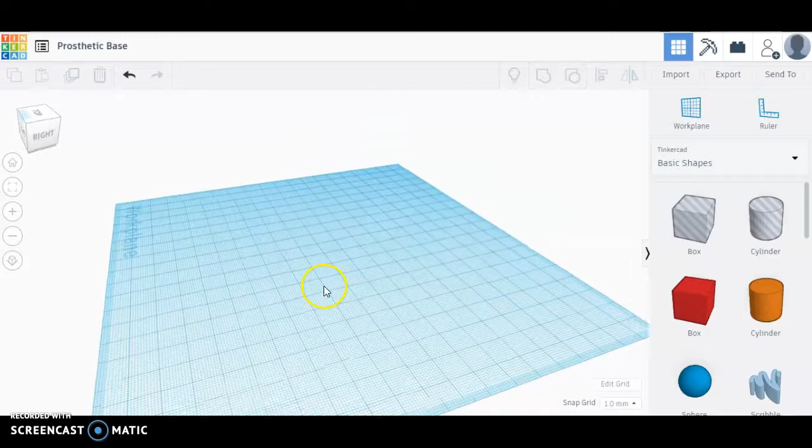Hi, this video is to show how to use TinkerCAD to build the base for the Whitebox prosthetic throwing arm in a way for 3D printing, as opposed to using balsa wood per their instructions.

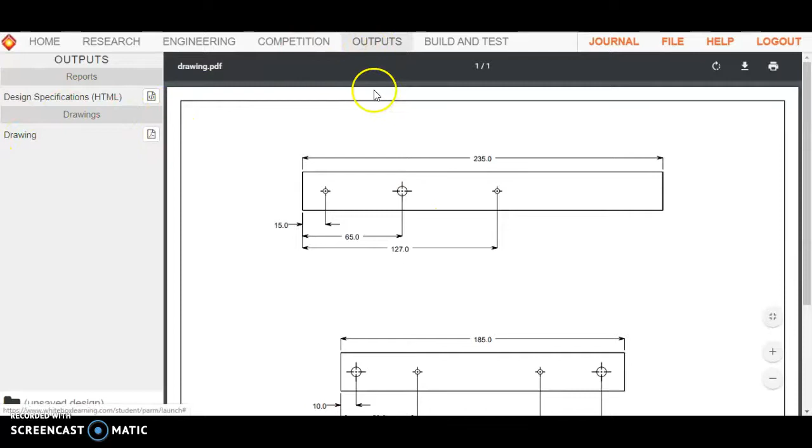We are going to be relying on the engineering drawing from the Outputs tab of Whitebox. This is the default drawing without any changes. Note that your dimensions are going to differ based on your specific design. We're also going to be looking at the build and test instructions and using these to modify the design or modify the build for 3D printing.

The first thing we'll need to notice is that the stock material here is 400 millimeter by 25 millimeter by 4 millimeter thick balsa wood stock. So when we build this in TinkerCAD, we're going to be using these dimensions.

Let's move over to the build instructions. We're going to begin by making a base from this 400 millimeter stock. This turns out to be important. We know that it's also 25 millimeters wide and 4 millimeters thick.

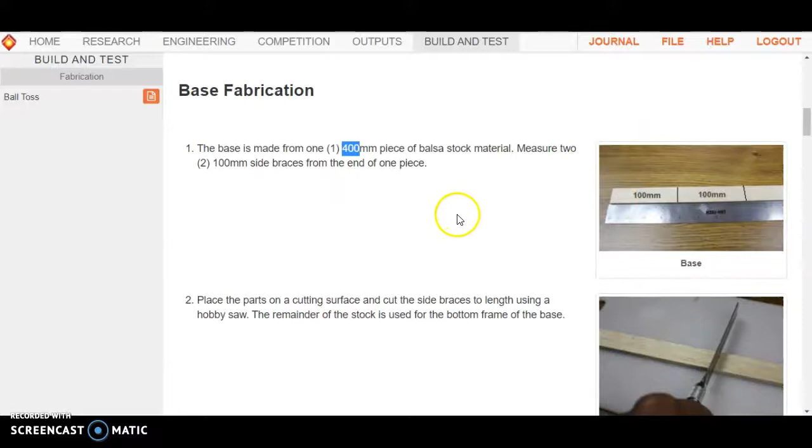The first instruction says measure 2 of these 100 millimeter pieces, and that's going to leave, out of this 400 millimeter stock, 200 millimeters left over. All right, let's get going in TinkerCAD.

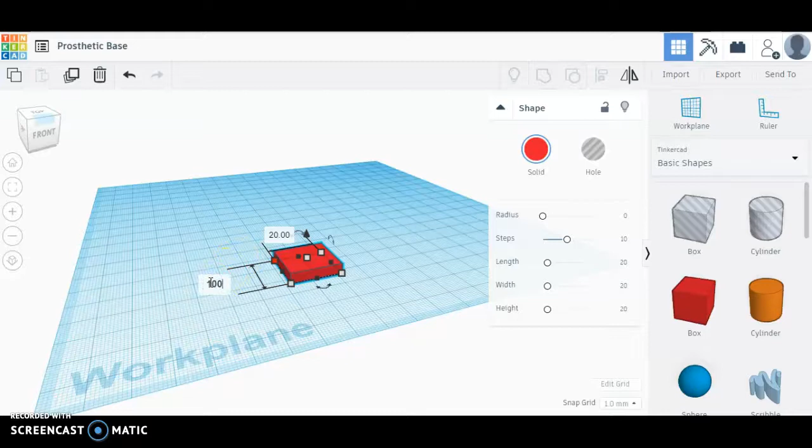We're going to add a rectangular cube for starters, and I'm going to reduce this height to 4 millimeters. Note that millimeters will be your default when you start working in TinkerCAD. Now, if I click on one of these corners, I'll have access to the other two dimensions. So we need to make this 100 millimeters by 25 — 25 is the width of that balsa wood stock — and I'll hit enter.

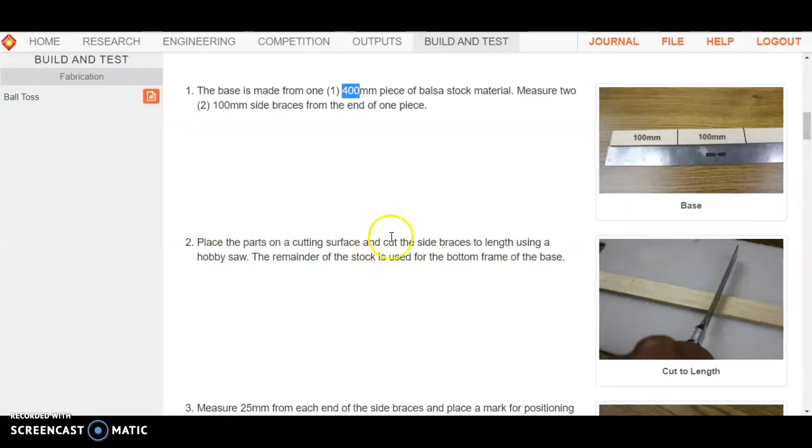We know ultimately we'll need 2 of these pieces, but since we're going to be putting a hole in them, I'll wait to copy until we have that hole in place. So, pieces are cut. We have our 100 millimeter pieces and our 200 millimeter piece.

Now we're told to mark 25 millimeters in. This is where things are going to line up with this edge. So this hole — there's no specification given for where to put this hole, but assuming that this line leaves 25 millimeters here, if we want to center that hole up, I guess it would be 12.5 millimeters from the end, to make it directly between the edge and this edge to center that.

Okay, so the hole needs to be 1/4 inch, which converting to millimeters is 6.35 millimeters. And you see how these pieces assemble here. So back to TinkerCAD.

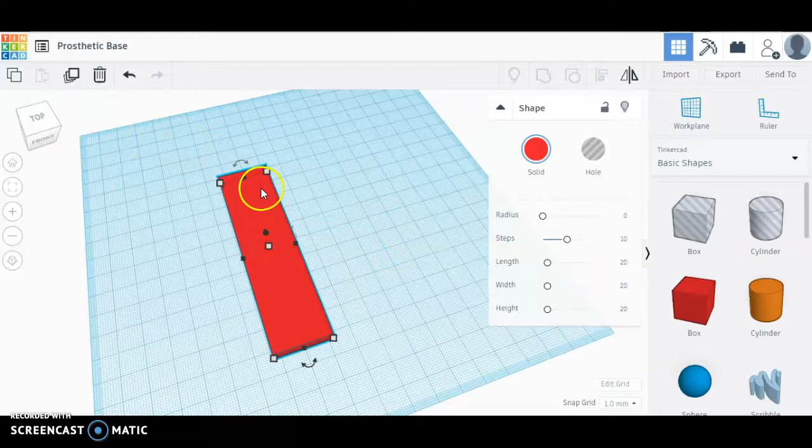We're going to want to begin by just making a copy of this piece that we can then make longer. Now there's a shortcut: if I hold the Alt button and drag, that should make a copy. I can also use the basic Control-C, Control-V. So this piece is going to be, instead of 100, 200 millimeters long.

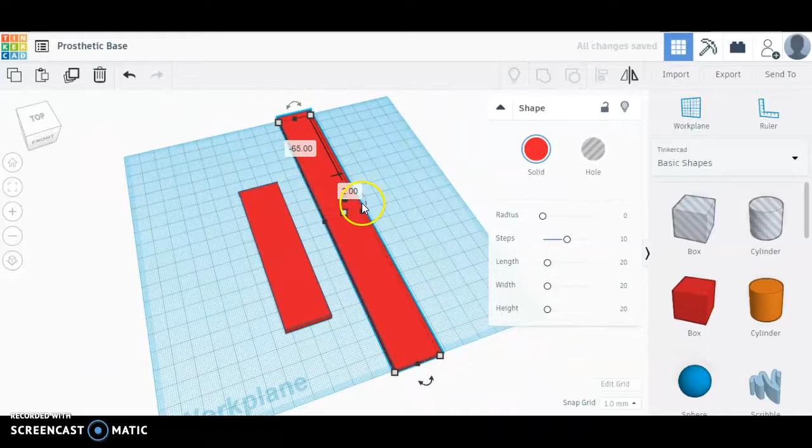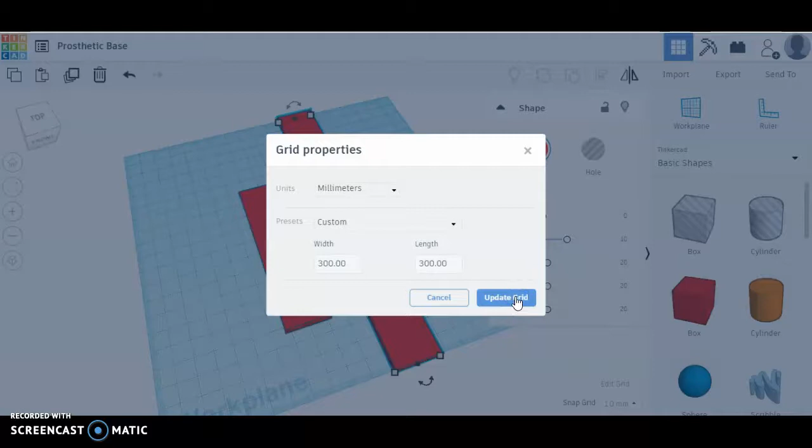Now note here, this piece doesn't fit on the grid, which is probably not any kind of problem. But if we did want to address that, we could adjust the grid, and so I guess it would just fit, but we could certainly adjust the grid to be 300 by 300 millimeters, or perhaps 300 by 200 would still have worked. Update the grid — now we're working on a larger build space.

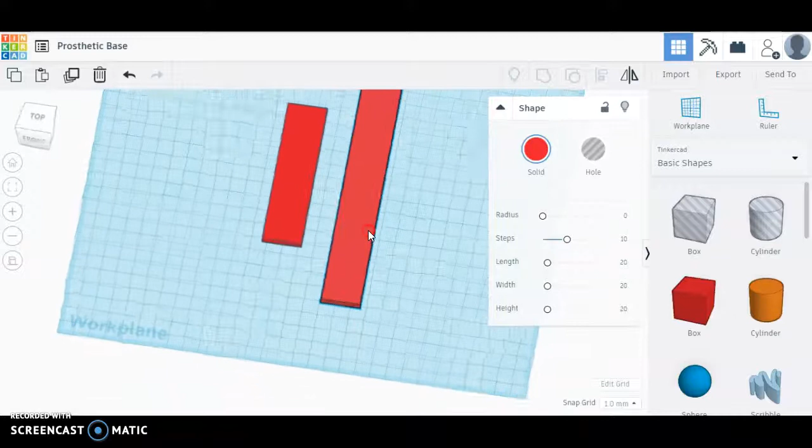Something that's going to help out here is if we use a top view as well as a perspective or orthographic flat view. Excuse me, we want to move off of perspective to a flat view for the purpose of lining some of these things up. Okay, back to a top view.

Next we're going to want to add the hole like we had discussed, at 12.5 millimeters. So I'm going to drag a cylindrical hole. I like to change the number of sides to the maximum just to make these things smoother and more consistent. If I drop the number of sides down, you see things are moving a little slowly.

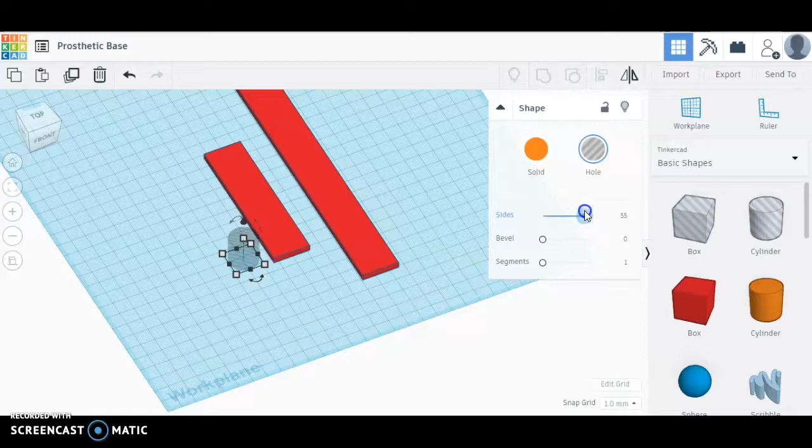You'll see that this thing is essentially a polygon. There you can start to see with a number of sides at 12, you can see how rough that is, and that maximizing those sides smooths that out.

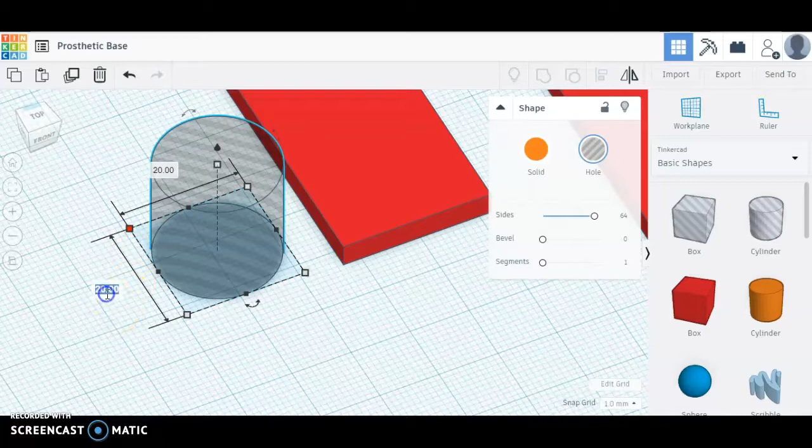Now, a 1/4 inch drilled hole is 6.35 millimeters. I'm going to recommend we bump that up to 7. The reason for that is that as these things 3D print and the plastic is melting, these holes often come out a little smaller than intended.

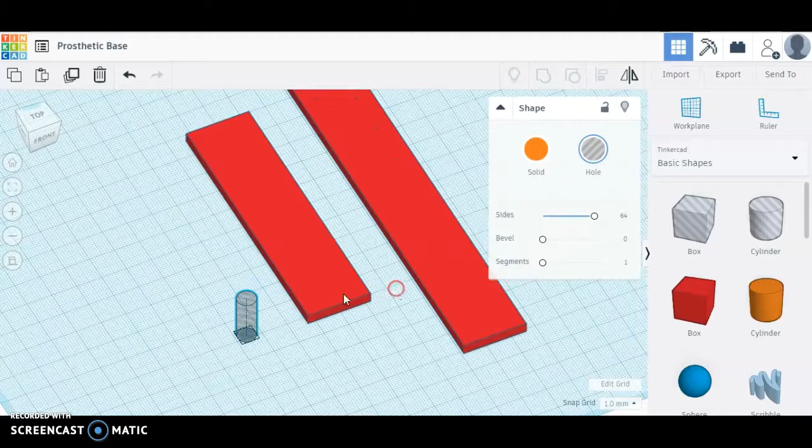Okay, so how to place this hole at exactly 12.5 millimeters. Here's a trick: we're going to use a ruler, and place it on one of our primary grid lines here. Notice that it's snapping to 1 millimeter, which is probably what we want at this time.

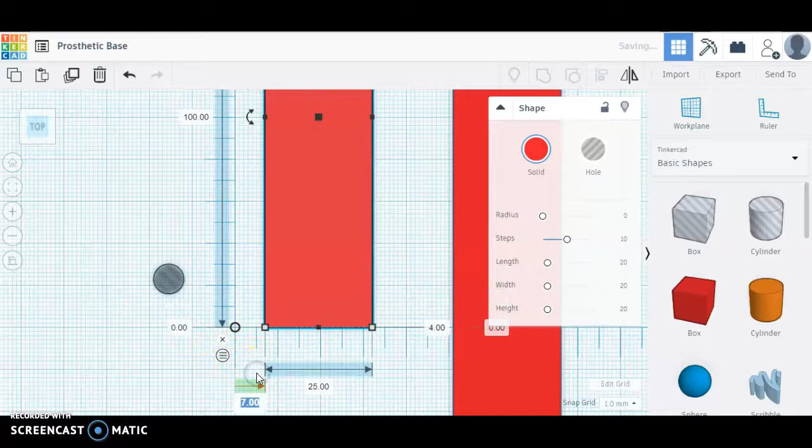With the ruler placed, if I select something, it's going to show me some dimensions with the ruler. I want to zero this corner to match up with my ruler. These dimensions in green are the distance to the corner of that piece, and you see that they're now perfectly aligned with the bullseye of my ruler here.

Okay, now if I select the circle, I'm going to change the measurement to use midpoint instead of measuring to an end. So instead of measuring to an end here, I'm going to measure to the midpoint. I wanted that to be 12.5, and that's going to place this exactly halfway.

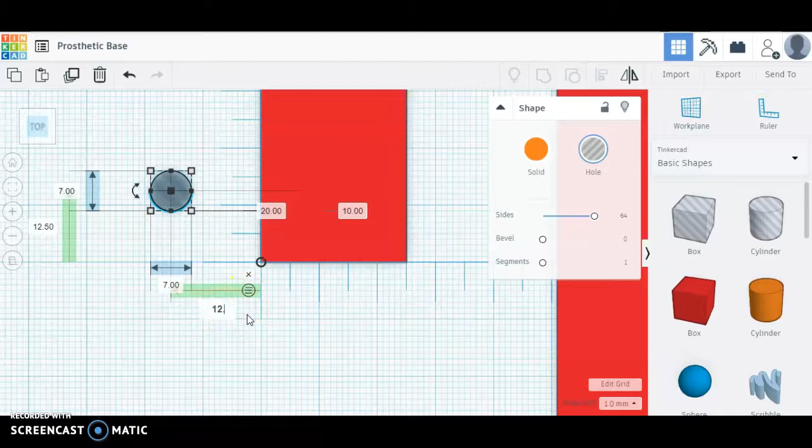Now to center this up here, I could change this because this is a 25 millimeter thick piece. If instead of -15 being over to the left, I change this also to 12.5, that's now 12.5 to the center of this circle, which is exactly centered. Might help to just see how that matches up.

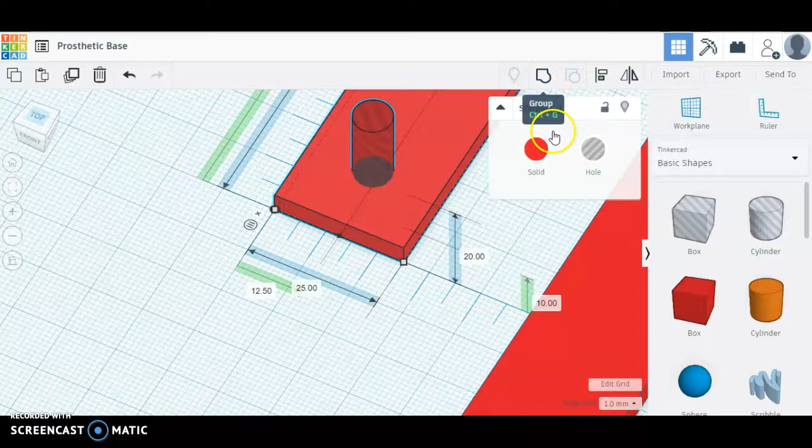Now if I select these two pieces and group them, I have a couple of options. I can click on group, or I like to use the shortcut Control G. I'll just click group since I'm there, and you'll see that it now makes this piece, putting the hole in the piece for me.

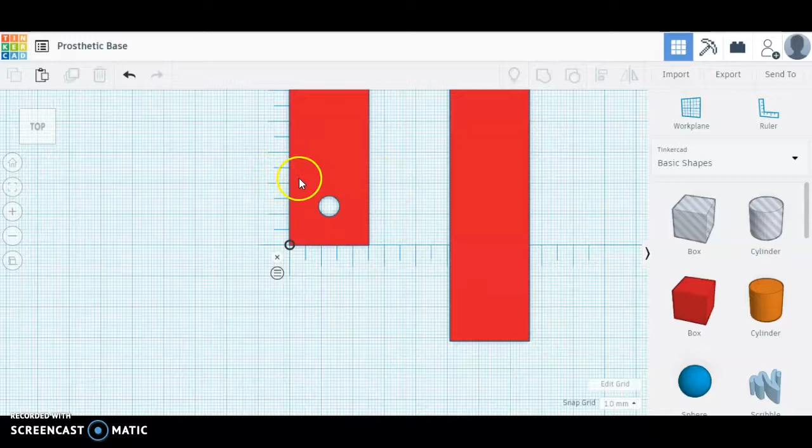Okay, as we talked about earlier, we need a copy of this piece. Let's go back to these instructions so you can follow along. This piece, you see how they match up on the outer edge: it's 25 millimeters between, and 25 millimeters to the end. For whatever reason, they didn't show the holes from the previous steps in these pieces, but we see later that they need to be here. So how do we do this?

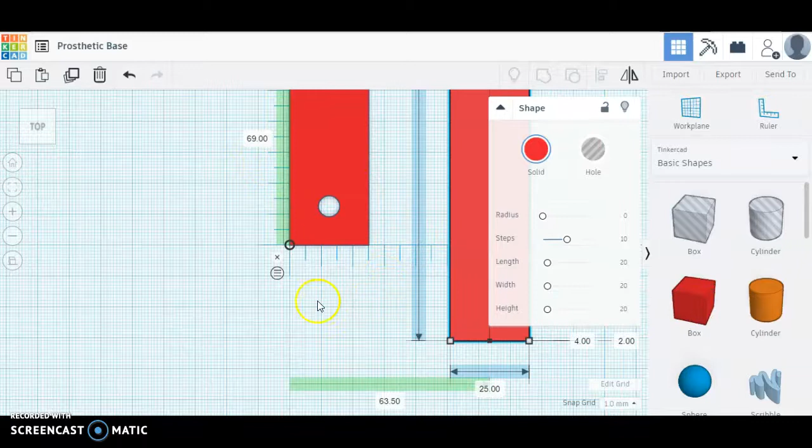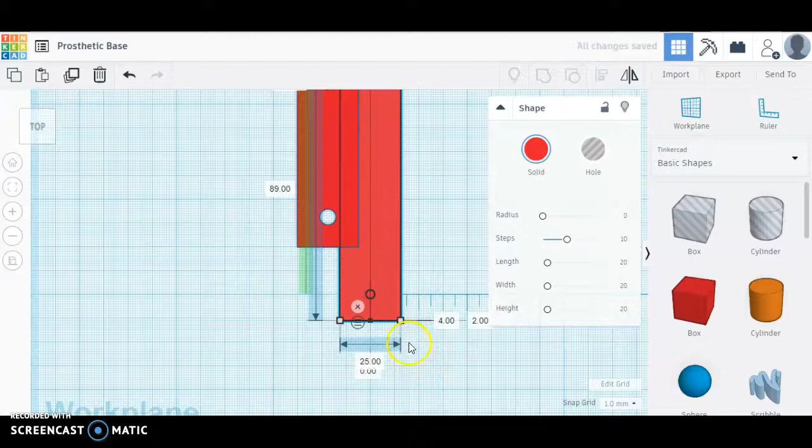Let's use our ruler again. We could leave it in place, we could move it around, or we could leave it there and move other pieces in relation to the ruler. But let's go ahead and move this large base and zero it to the ruler. We're going to want to get back to use endpoint, not midpoint. So 0, 0 - here we are with this corner exactly on the ruler.

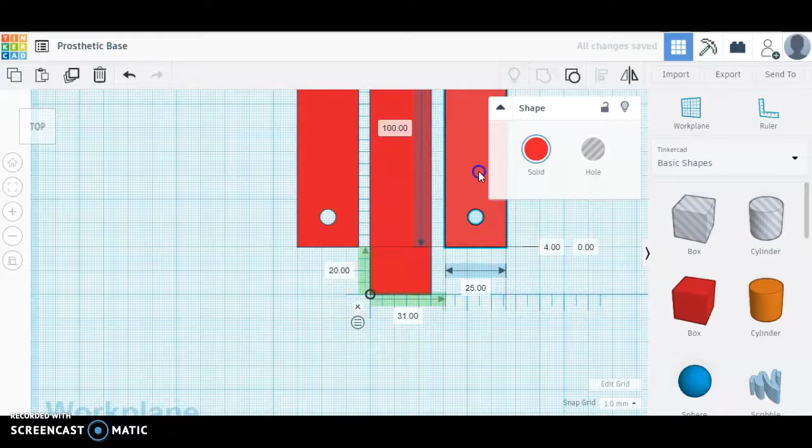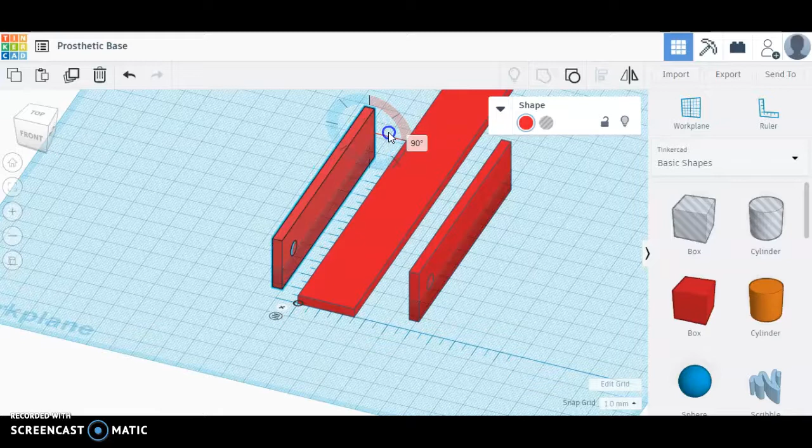I think at this point we could hold the Alt button to drag a copy of this piece. We can flip these up using the rotate tool. We want to go exactly 90. If I hold the shift button, it will lock that to some of the more major rotations. While holding the shift button, we're at 90. Now you might notice that we rotated along that axis.

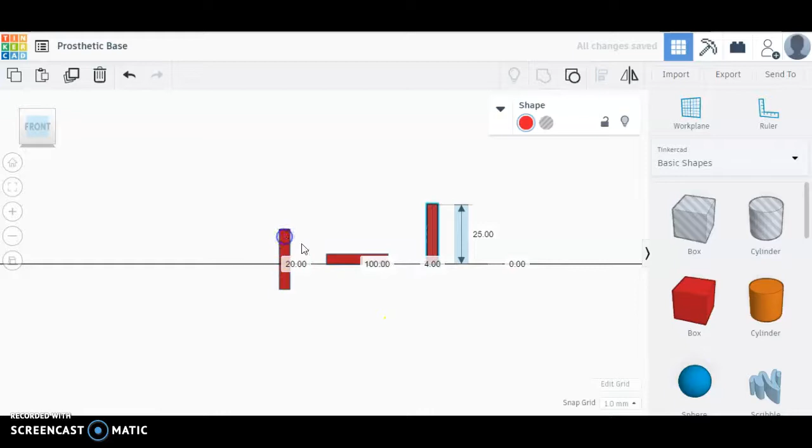So here's another trick to get these back on the plane: we can move them up and down till they're how we want them. This would be one option, moving it till it's back on the plane. The other thing we can do is just hit the D button for drop - that's a shortcut. Likewise here, D for drop. Now everything is on that plane.

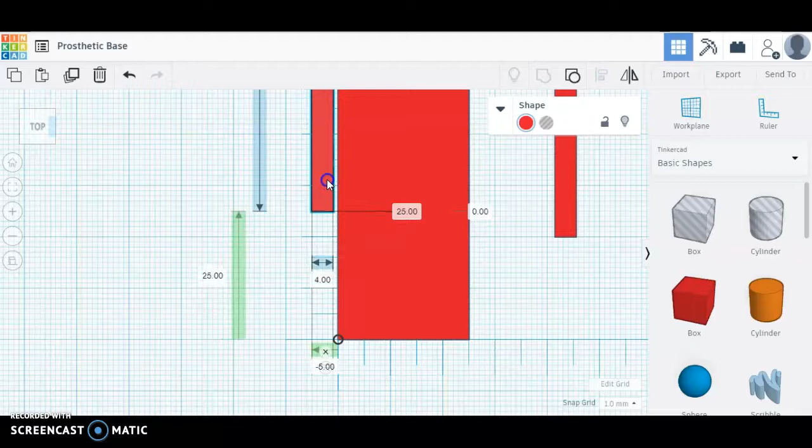The last thing we'll need to do is move them into position. We could do this visually or mathematically, but we know we have 5 millimeter gradations here - 1, 2, 3, 4, 5. We know this needs to line up exactly, so I can also just move these pieces. I've got a couple things going for me: one, I have my 25 millimeters using the ruler, and I can also count here that we are 1, 2, 3, 4, 5 times 5 millimeters, or 25 millimeters.

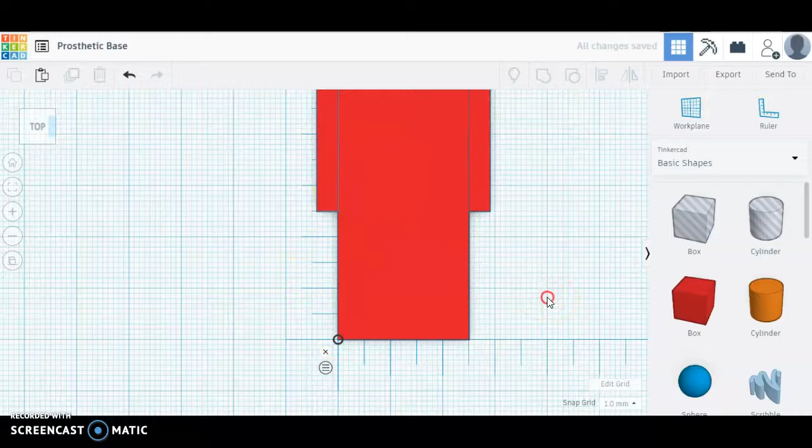Likewise here, we can move that up until it touches, confirming that we're 25 millimeters from that point. With the exception that I think I've placed those wrong, because they're actually supposed to extend 25 millimeters out. I think we're getting pretty close here. So let's go back to a top view.

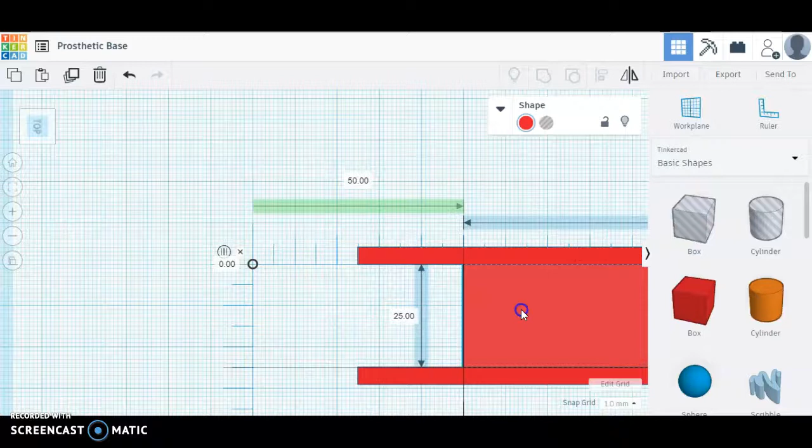Perhaps the easiest way to fix this is to grab this center piece now and just move it to 5, 10, 15, 20, 25.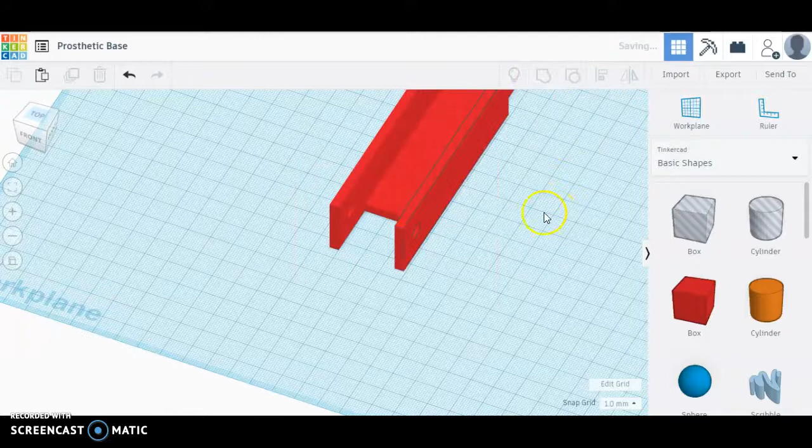And that should work just as well. The last thing I'll do is delete the ruler, select everything and group it using that group button. And we now have our base ready to be exported and put on the 3D printer.